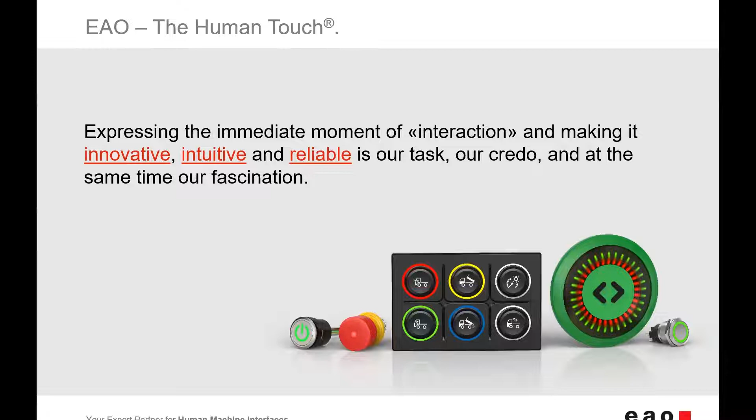The human touch, this is our credo. Expressing the immediate moment of interaction and making it innovative, intuitive, and reliable is our task, our credo, and at the same time our fascination. Behind each interaction lies a need, a story, a wish, and a goal. These are just as diverse as the requirements for the operation of machines. So our target is to always find the best solution for the customer requirement.

Through our 4 production companies located in Switzerland, Germany, the United States, and China, then 10 sales companies and a distribution partner network in over 50 countries, we can guarantee global availability, ready on time, around the world, around the clock.

Let's have a short look at our main markets. Our range of services and our expertise allow us to offer complete individual and system-based HMI solutions into our key markets. We focus on the following markets: transportation, automotive, heavy-duty special vehicles, and machinery. However, by our long tradition and many decades on the market, our products are serving many other markets and industrial applications. But today we want to focus, as already mentioned, on heavy-duty and special vehicles.

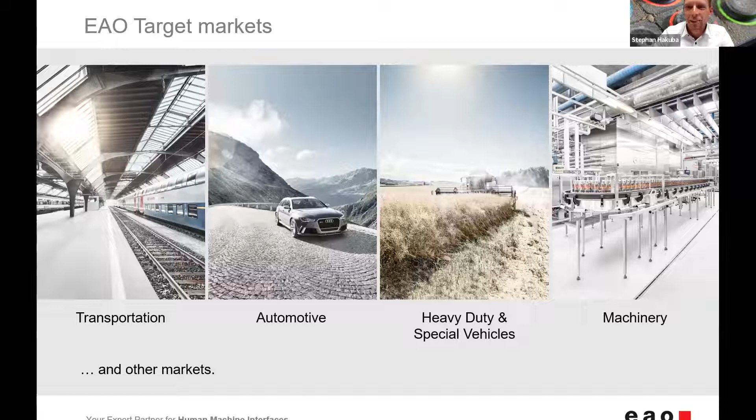Within this market, we have to fulfill the most demanding requirements for our products. In general, we talk about off-road and on-road vehicles with key applications in driver's cabs or outdoor applications as well. Key requirements are ergonomics, design, safety requirements. It must be configurable, intuitive operation, a rugged construction, and reliability. The main target for the HMI is that the operator has to be in full control over the vehicle or the equipment at all times.

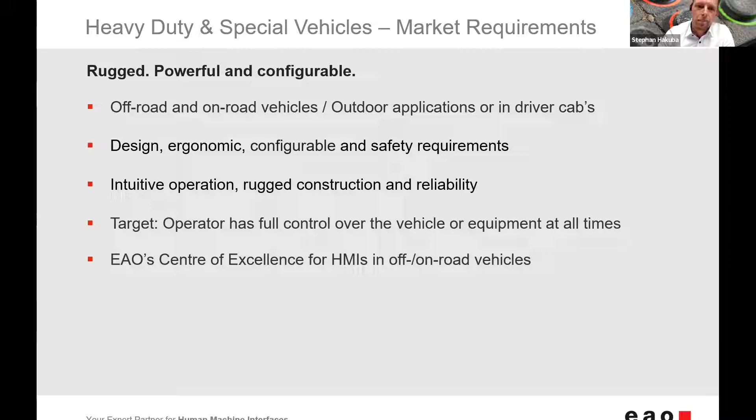To learn more about the requirements and the needed technical key features, it is a must to learn more about the market and the applications to create a detailed requirement analysis. I will show you some typical examples. Within the market heavy duty, a typical sub-market is construction vehicles. The application field can be the driver's cab, and the application itself is to control the engine speed during excavator operation. This is just an example.

Of course, there are more applications. The needed function in this case is the momentary push of the button. The required key features are robustness - that means very high impact resistance, high protection level of IP6K7, meaning the keypad must be resistant against water and dust. We need good tactile feedback. Also, high brightness of the illumination is very important, to make the keypad visible against sunlight, for example.

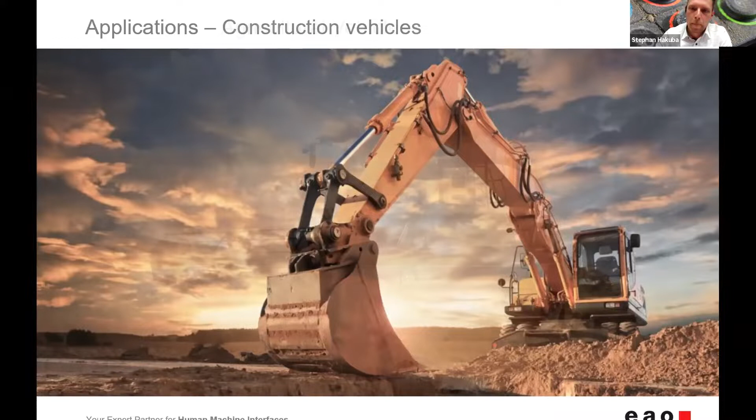Another very prominent example is the submarket of agriculture vehicles. Concretely, I talk about a combine harvester. A typical application could be a control unit outside the vehicle, needed for unloading the grain tank with a pipe - just an example. You can imagine that the required key feature for this HMI is very tough. It must be extremely robust, resistant against dust, water, UV light. The user needs optical feedback while pressing the button. Furthermore, a high brightness of the illumination is also a big requirement in this case, to make it visible against sunlight.

The next example relates to the market for special vehicles. This is also our focus market, and the submarket of fire trucks, for example. A keypad is required to control the ladder. Our application field is outside, and needed product features are also robustness, resistant against environmental influences, a very high temperature range, and resistance against water - that means a high protection level is also needed, and intelligent user guidance through optical feedback of the keys.

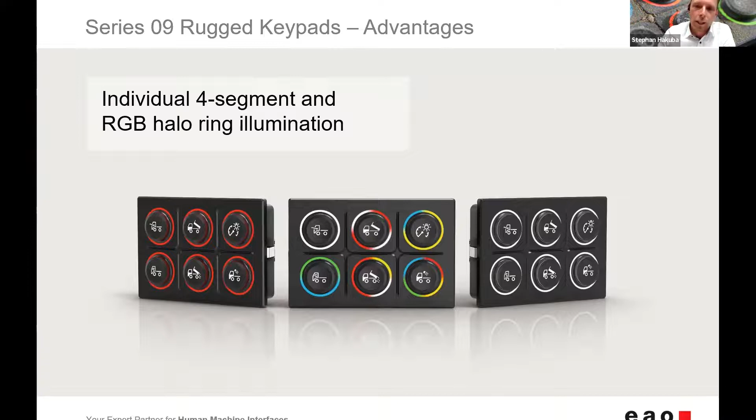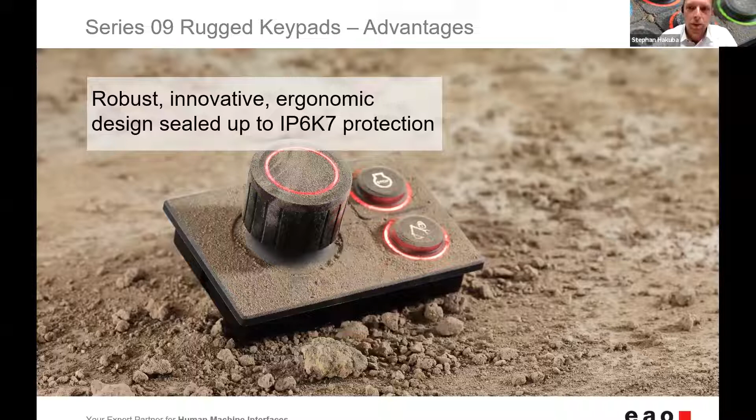Yeah, as already mentioned, safety is very important, especially in our focus market. In addition to the general issues of reliability and fail-safe topics, we have design features in hardware and software as well that ensure functional safety in accordance with the relevant standards.

And last but not least, the last key feature for today are the exchangeable symbol inserts. These inserts are a replaceable part of the complete closed keypad surface, and can be replaced by the customer to adapt the keypad to the respective use case.

Furthermore, another advantage is the replacement in terms of sustainability. After many years of hard customer use, it could be that the keypad symbols may no longer look nice. In this case, the symbol inserts can be replaced and the keyboard can be used in the vehicle for many more years. This is also a big advantage.

We can provide the full range of ISO 7000 symbols. This is a range of standard symbols - we talk about 5,000 different symbols. Or the customer can choose specific symbols. This is another added value for the customer because he has a unique design and also the recognition of his own system and own brand.

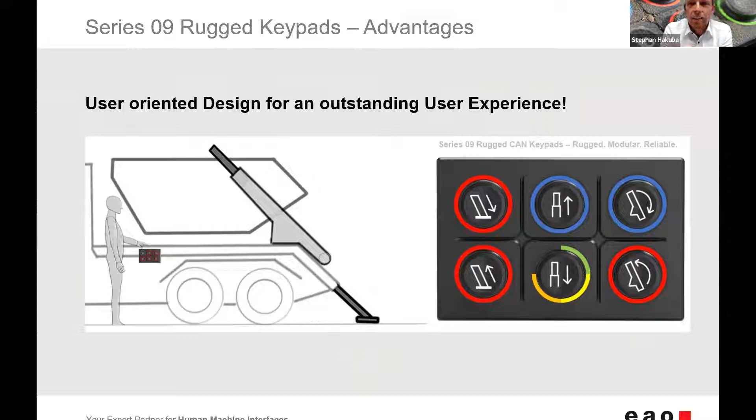Okay, I have shared a lot of information. Let's have a look at a practical example. I think this is also very important.

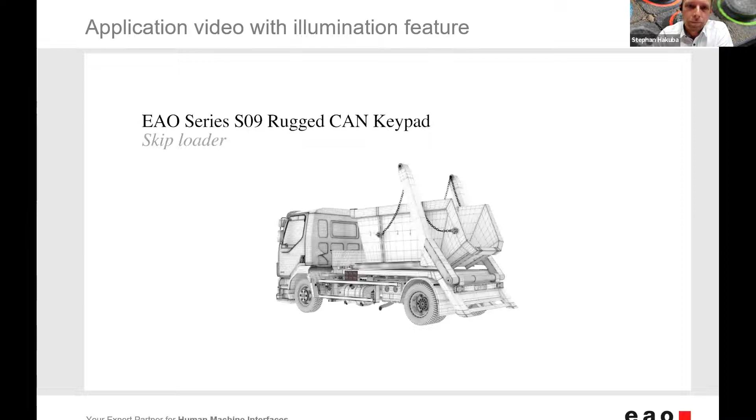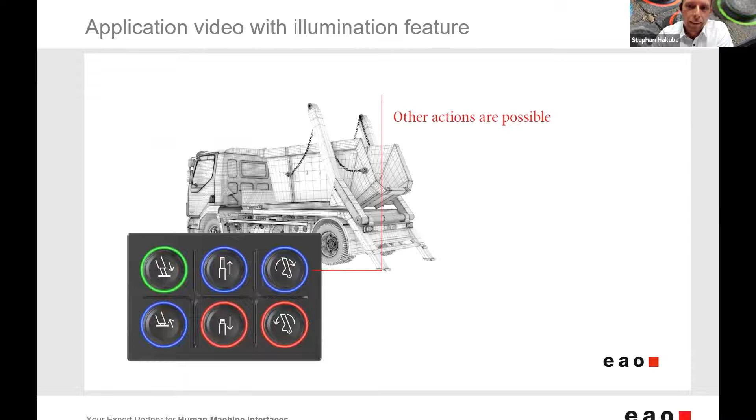In this short video, you can see a typical use case with a skip loader in the market of trucks. The first operation is to extend the supports. And as you can see, the keypad shows an optical feedback, and then the next operation step is possible.

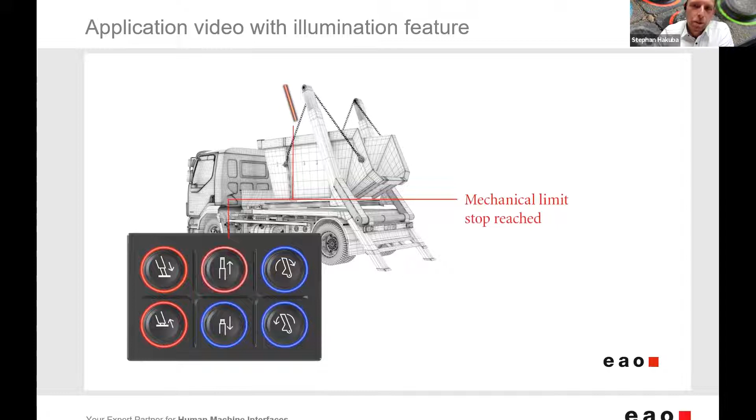In this operation, the segment illumination shows the status of the hydraulic cylinder. Then the container is set down. Return the container.

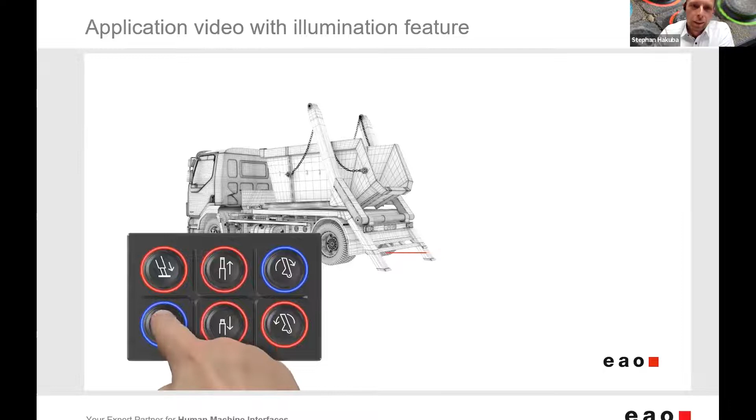Again, the 4-segment illumination option. And at last operation, retract or back to starting position.

Yeah, this is a practical example. And this is a good time now to hand over to Dominique. He will show you more details about the UX design process.

This is a virtual representation of a real application for our Rugged keypad. There you can actually see the main advantages from the UX point of view, from the user's perspective. First, you have...

As Stephan already talked about, you have the visual feedback at the place where you interact with the product. We call this the intelligent lighting or the user guidance.

Second, you can show procedures or conditions in small animations. You can use these halo rings as a little animation. You can rotate, flash, do everything. You can change colors and show a lot of stages or things like this.

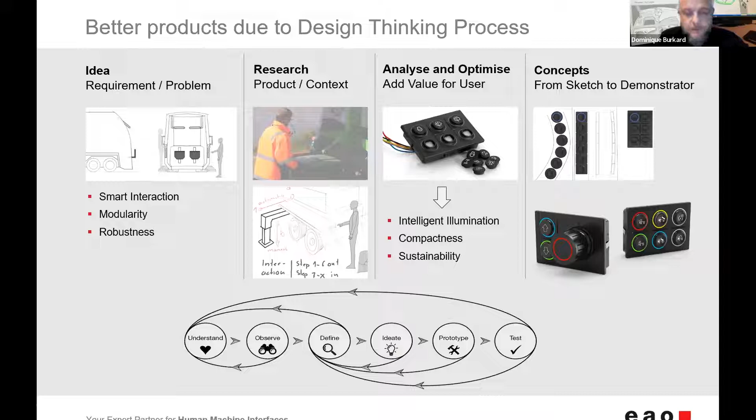It always starts—this is my job—when we see a real application, we try to put in our product and start with a concept, mainly with a storyboard from the user's point of view. We try to capture each step I have to do, and also show what could be the optimal illumination animation for the single step.

This helps a lot to understand the functions, but also to show it to the customers or users how it works. So you automatically receive a lot of feedback, and you can go through a next loop and then build it into the application.

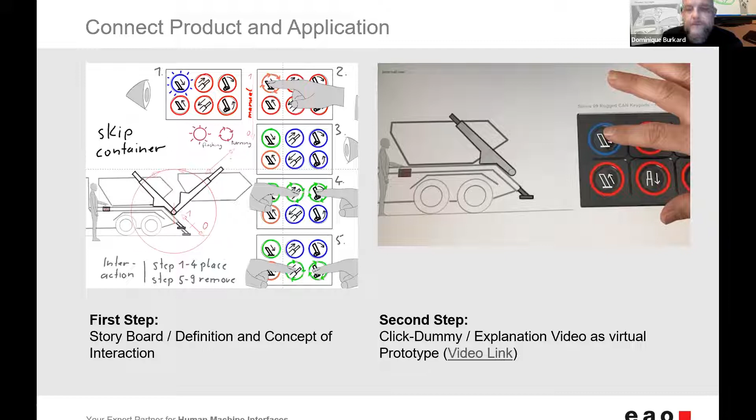In order to offer the user even more flexibility in the future, we are in the process of collecting further customer needs and inputs on the current product version, as you had seen before, or as you see here on the right side, this 6-button application. And we will bring the customers more flexibility.

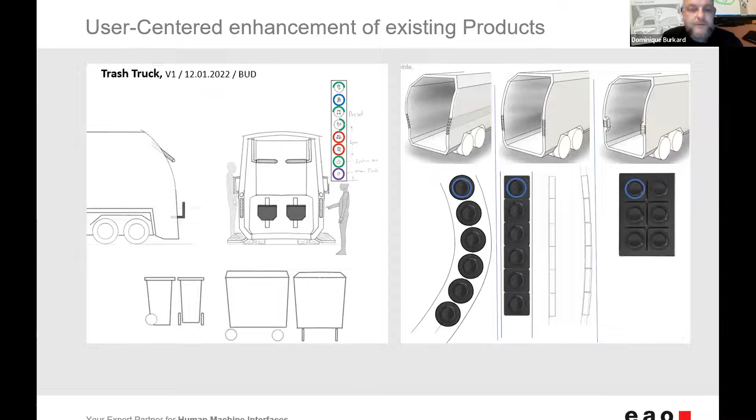Thank you, Dominique. So as you all may know, the first design of a product doesn't always correspond to the final product. That's why I want to say some words about the engineering and development process we went through regarding this product. In the beginning of this process, there was a product idea.

We wanted to create a product or a product series for the heavy-duty special vehicle, truck, and bus market. This product should consist of push buttons, rocker switches, and joysticks, and all these functions should be interchangeable in one product. By the way, this product should be robust.

This product should be robust, modular, and compact. One of the main functions of this product should be the extensive illumination features regarding the symbol and halo ring illumination, which Dominique and Stephan already mentioned.

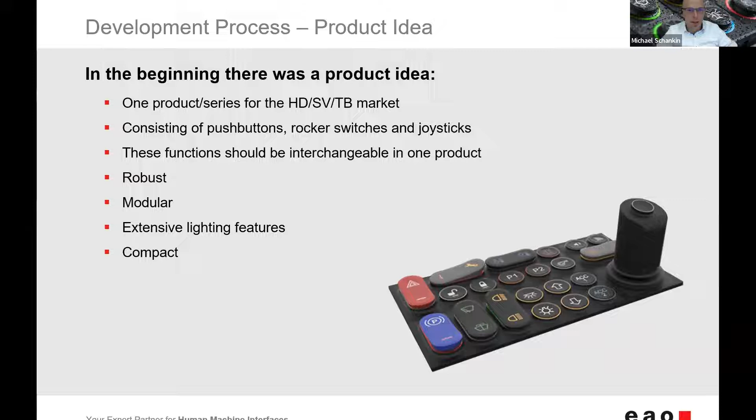In the first step, we classified and weighted all the features I mentioned before against each other, and we found out that not all these functions could be put into one product. So we made a requirement analysis and concept engineering, and found out that it wouldn't match in one product. We had to split what was supposed to be one product with all interchangeable functions into 3 different product lines.

That means we decided to develop a push button keypad, a rocker switch keypad, and a keypad with an RCC joystick controller. This was the first step.

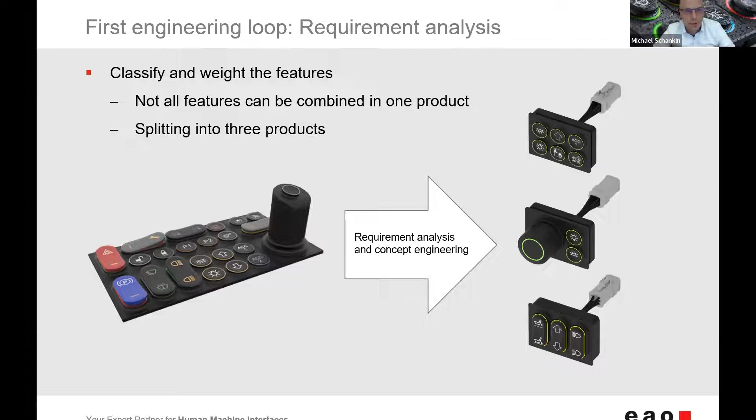In the second step, we started with simulations and prototyping of this second design step regarding the most important product features. We concentrated on robustness and illumination of the product, because these are the main features in our opinion for this product. You can see in this table the 3 steps we used.

At first there was a design, and regarding robustness, you can see the design of one push button here as an example. Then we did an FEM simulation of this design, and you can see this red color in the simulation picture. That means there is really high material stress in this material while pushing the button, which could lead to damage on the button in the field.

This was tested on a prototype, and as you can see in the picture of the prototype, there is a crack in the material. So the simulation was right in the first step.

We also made simulations regarding the illumination. We simulated the thermal dissipation on the PCBA, because a lot of light causes a lot of temperature. And if a PCBA gets too hot, it will get damaged, or it will die, in short words.

We did a simulation of this design and found out that there could possibly be a temperature of 250 degrees Celsius on this PCBA, and normal electronics won't survive this for very long. We also did prototyping to see if the simulation was right, and we found out the simulation was right.

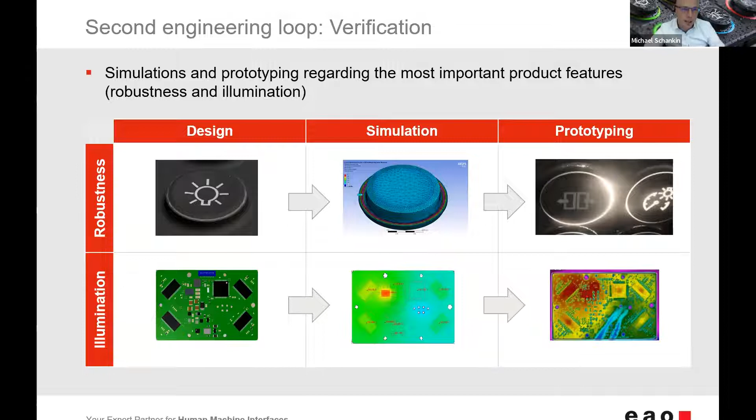So we saw that the first design was a good design, but we had to redesign the product in some steps because it wouldn't work in reality. We did several engineering and simulation loops and found out that the product could keep the design, but we had to move the halo rings a little bit and make the product a bit larger.

After we did these several loops and found the final design, we did another simulation and validation loop again. You can see the same table as before. We have the new design of the button.

We also did a simulation again while pushing the button, and now you can see there's no red color anymore, only yellow, so the material stress is not as hard as before. The PCBA was also redesigned, and we did a thermal simulation again.

And there you can see, you can't read the numbers which are written there, but we are only at 120 degrees now according to the simulation, and the heat dissipation over the whole PCBA is much better.

So we said, okay, that will work. We went to the serial tools because we did verify in the prototyping loop that the simulation is right. And now you can see on the right column that we were right. The prototyping of the serial parts showed us no damage anymore on the push buttons, and also the PCBA isn't getting so hot anymore.

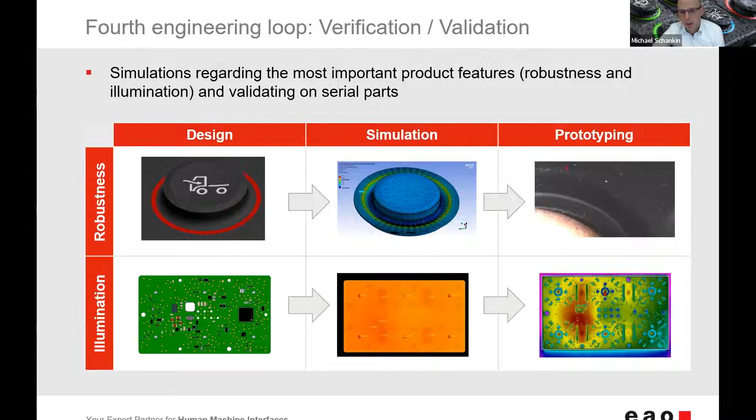So this design worked well. So at the end, we went through these four loops. That means we had a design at the beginning. We did a requirement analysis, concept engineering, as you all know, according to a V model. We made the second loop with a new design and several other simulation and engineering loops, and we ended up at this really great product.

And all the time, with all the simulation loops and also the design loops, the customer was in the loop, because if you make the product bigger or you split it, you have to talk to the customer. And also the customers found out that the design at the end is much better than the design at the beginning, from the side of usability and visibility. And that was, in short words, the process we went through in engineering here.

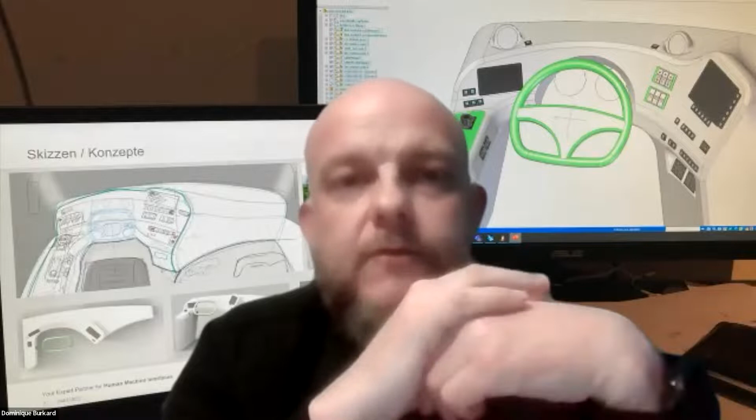You have green, then you are 2 meters from the end point. Then you go 1 meter, you have orange, and you're a little bit closer to the wall. Then it's red, and you know you have to stop. So you can imagine thousands of elements you can put in this keypad. We call this the intelligent illumination.

That was the process. So with each step you have something, you test it, you see it, and then you have more ideas of what you can do with it. It's a bit the process of all this, but mostly it starts with an idea, a rough sketch, and then it goes on.

So is it right to say that it was more of a qualitative, iterative trial and error approach, of course based on solid knowledge, or was it more based on data?

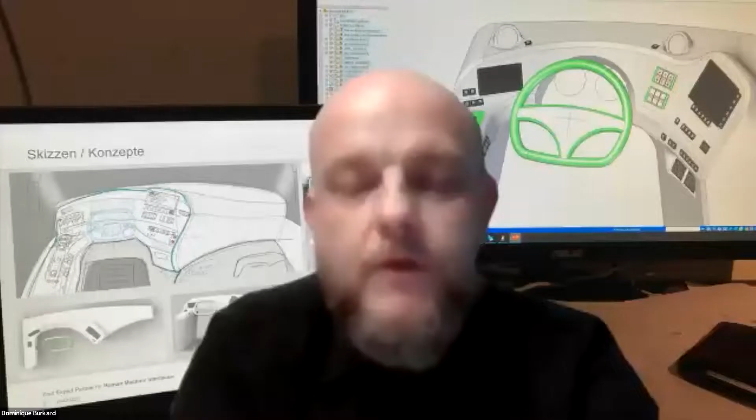No, it's a pragmatic approach. Yes, it's really a hands-on approach. You have something, you go, you show it, and you receive the feedback, so you receive input, and then you go further. You make the next loop and go out with the new concept. You try, or you have several concepts, and you go and ask and show them to different people, and then you see what are really the needs of the users. So you can go in the right direction, I think. And with this product we did a good job, I think.

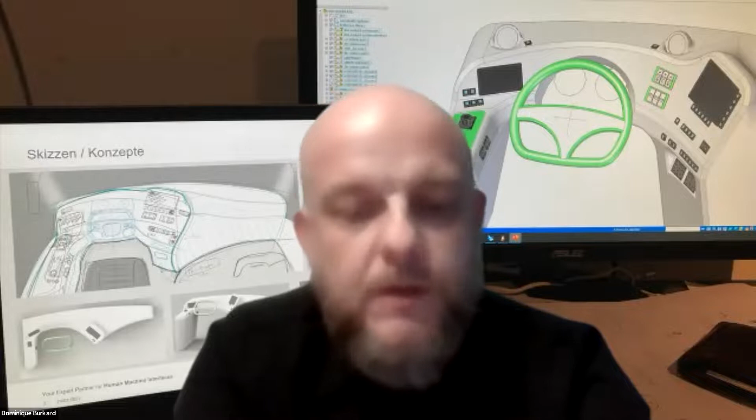Maybe to give you an example of what we did regarding user experience, you all saw that we have applications for fire trucks or garbage trucks and so on. What we did here is we went with our prototypes to the manufacturers of these vehicles, talked to them, got feedback from them. What was also important was not only talking to the manufacturers, but also talking to the guys using this in the field, for example the firefighters or garbage truck drivers. The interesting thing is you always get different feedback from the user than from the manufacturer, and that's what you have to combine, and then the product will become a great product.

Yes, I think this is the most interesting part. We could probably spend half an hour talking about anecdotes, what manufacturers think their users need and what they actually need, right? This is the old problem. But also Lars asked another question which adds on to this.

How did you actually evaluate prototyping? When you prototype, how did you evaluate the results? Is there a systematic method that you used?

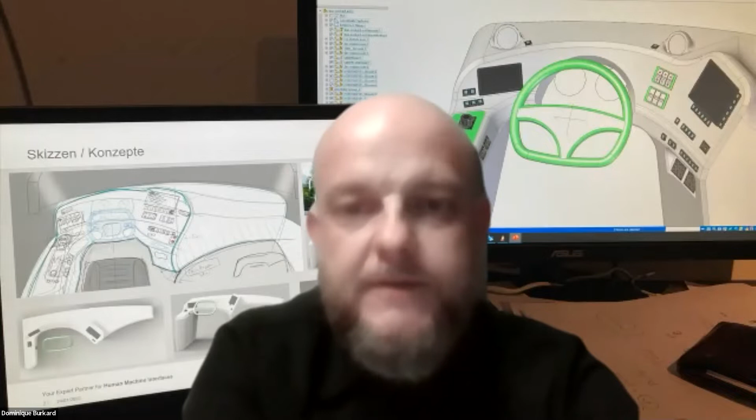And we know gamification is one of the big trends on the market, but gamification means making it as simple as possible for the customer and for the user. This is what we already mentioned: the keypad function is freely programmable by the car manufacturer to make it as easy as possible for the user, to create a real user guidance. This is our gamification.

I think it gets as good as it can. I mean, you have the possibility to actually bring in, through feedback, lighting, and more flexibility, but also a touch of emotions into something as simple as keypads in a very professional, hardcore working environment. So it was actually one of my questions, where it's possible to bring emotions into such a technical field, and I think you get very, very close to this.